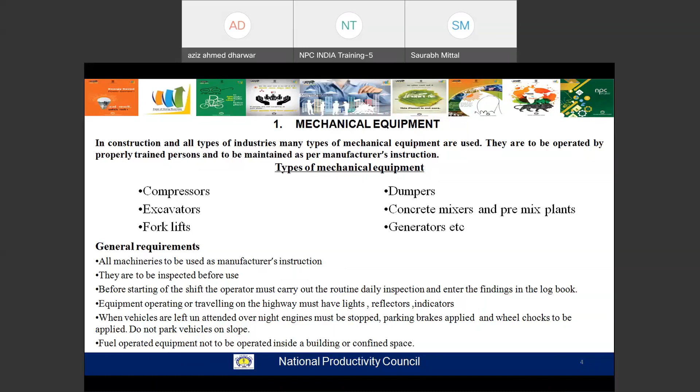Okay, so next part, regarding the dumpers. Dumpers we have seen in many places, and we normally use them in the construction field. These are normally called tippers also.

The main important safety aspect here is that overturning might happen, collision might be there, especially on slopes there are chances it may overturn. We have some safety devices with respect to overloading etc. that have to be kept properly. And for loading, normally what we do is we overload it.

For using these dumpers of different types, there are different safety precautions, especially the rear part, the skip. If the dumper or tipper is very long, when it is being lifted, the safety precaution we need to check is the overhead wires, overhead cables. If overhead cables are there, there are chances it may be electrocuted, so we have to watch for that.

Apart from these safety precautions, normally a reversing alarm is there, a flash beacon is there, and brakes have to be tested regularly, and drivers have to be trained properly.

One more thing, apart from compressors, normally we use forklifts in the industries, maximum places use them in industries. They have to be used carefully because one thing we've seen with forklifts is they are battery operated, especially when used inside the industry.

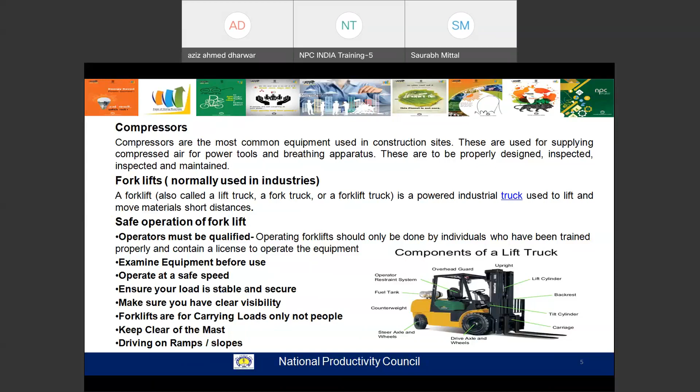Loose items are not to be carried on the forks because there are chances it may fall. It has to be tied properly. The items should be tied properly, and only then should it be used. But the main thing is that the driver has to be trained properly on how to use the forklift.

With respect to generators, this is also a main important item in industries as well as construction. Earlier, open generators were there and there was a lot of sound. But nowadays we have acoustic containers, where in the figure you can see the acoustic container, and the generator is normally used for the supply of power.

Whenever we use a generator, the exhaust has to be directed properly, normally outside the container or acoustic container. There are a few things to observe here. What happens normally while refueling the generator with diesel, or while servicing it, is that there are chances the fuel will spill out throughout the container, and that becomes a very good chance for a fire hazard.

So we have to check that in case there is a spillage of fuel or oil, lubricating oil which we use for servicing, etc., we have to clear it off. Normally it is used outside, and the sound effect also will not be there.

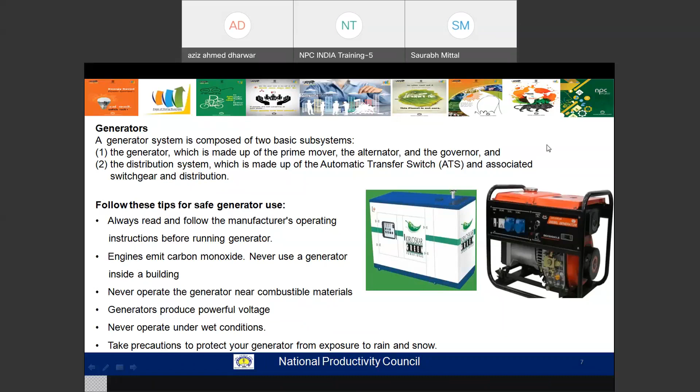Next part is mechanical hazards. What are the different types of mechanical hazards with respect to different types of equipment? Whenever we are having a mechanical equipment, there are chances that we may come across some mechanical hazards. Normally these hazards are of different types, as given in the slide.

The rotating shaft hazard, pulleys, sprockets, gear entanglement. Hard surfaces moving together or crushing, scissor or shear action severing. Then sharp edges, moving or stationary, cutting or puncturing. Cable or hose connection, slip, trips, and falls.

These are the different types of hazards normally what we come across with respect to mechanical hazards. Depending on the type of machinery or equipment, these hazards are applicable. So whenever we are working on these things, we need to have a safe access, and there are certain corrective or preventive measures we have to take care of.

Number one, first and foremost, we should try to eliminate it. In case we are able to eliminate it, that is well and good. Normally the elimination takes place at the initial or engineering design stage itself. Second is administrative control.

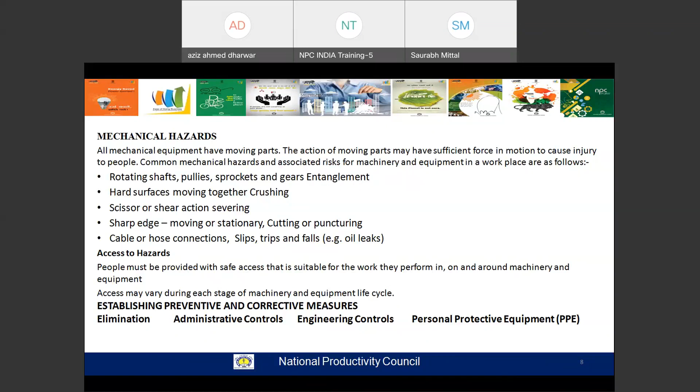Now when we say risk control for mechanical hazards, these are the three points we need to check. One is distance, second is barrier, and third is time. Distance means we have to keep a person without coming in contact with the hazard; he can operate from a distance.

A barrier can be put in between where the person is not able to reach the hazard, or a control of the ejection parts, etc. And time is normally what happens: the moment it is connected with sensors, the moment the person comes near that particular place, the machine stops and becomes disabled.

So regarding the barrier, normally we use guarding, which with respect to our Factories Act, Section 21, is given as fencing of machinery. The guarding can be of any type - fully covered, half covered, or quarter covered - but the only requirement is that the body will not come in contact with that particular hazard.

Second is the interlocking. Interlocking can be mechanical or electrical, hydraulic or pneumatic. The moment you want to start the machining, interlocking facility will be provided - until you lock it or cover it, it will not start. Suppose in case you start it anyway, it will give an indication that the door is open, or something like that.

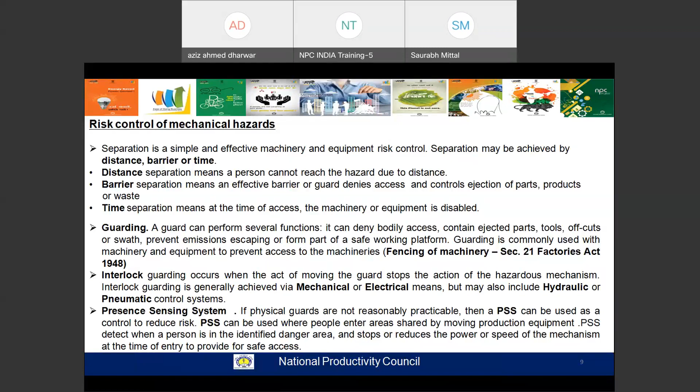Next part is control of non-mechanical hazards. Non-mechanical hazards are of two types. One is ventilation and temperature, where smoke etc. is likely to come up. This is non-mechanical, meaning it is a hazard produced by a mechanical equipment. So here the main thing is ventilation and temperature.

With respect to the Factories Act also it is given - ventilation and temperature are both interrelated. In case the ventilation is not available, then definitely the temperature will increase and dust and fumes also will be present.

So when we check ventilation, we have two types: one is mechanical and one is natural. Natural ventilation, we need not have any equipment - we can open the doors, windows, etc., and whatever gas, exhaust, or smoke is available will just go out. But for natural ventilation, we need to have a flow of air.

Whereas mechanical ventilation, we have two types: one is local and one is general. Apart from that, we have HVAC also. Here we'll be using two types - one is general ventilation, where the exhaust fan can be installed and whatever heat or dust etc. is there, is thrown out.

Apart from that, there is local exhaust ventilation, where wherever the heat, smoke or dust is produced, from that particular area it will be sucked and thrown out. But for local ventilation, we need to have a collecting point at the exhaust end. That is very important, because we cannot just throw the contaminants from inside the factory into the open air.

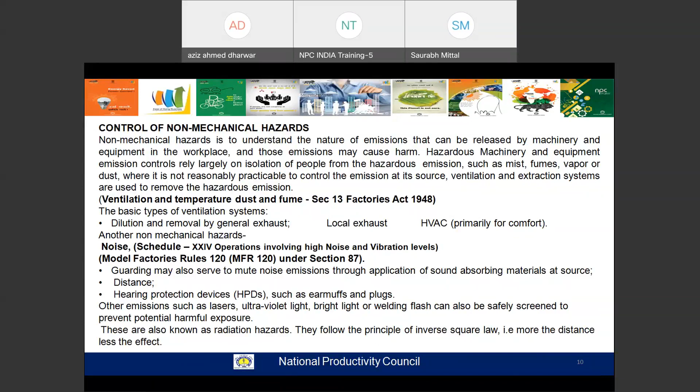Next part we will come to crane safety. Cranes are used in different types of industries as well as construction sites. So what is a crane normally? It is a lifting machine. Lifting means it lifts vertically; you are not supposed to use the crane for horizontal pulling, etc. For the basic principles of the crane: number one, whenever it is installed, it has to have a center of gravity, it should not have an imbalanced gravity. If the center of gravity is not there, there are chances that the crane is likely to trip off.

Second one, leverage. For leverage, the principle we normally follow is the safe working load - the capacity it has. Accordingly, we have to lift it. What is safe working load? We'll check that out later on.

Then stability of the crane is very, very important. If the crane is not stable, it is likely to topple off. For stability, we have to check it out with respect to the foundation - where the crane is standing, where it is situated. When we say foundation, it's not only the crane itself, it has to be the ground level also - sound, solid ground. In case there is disturbed sand, especially in construction, there's a lot of disturbed soil available, because many times it so happens that we go for trench excavation, etc.

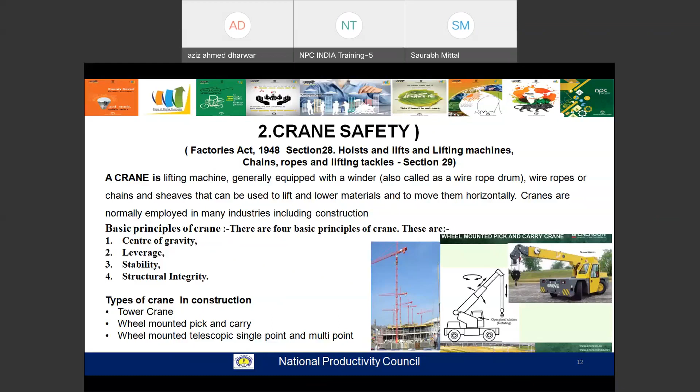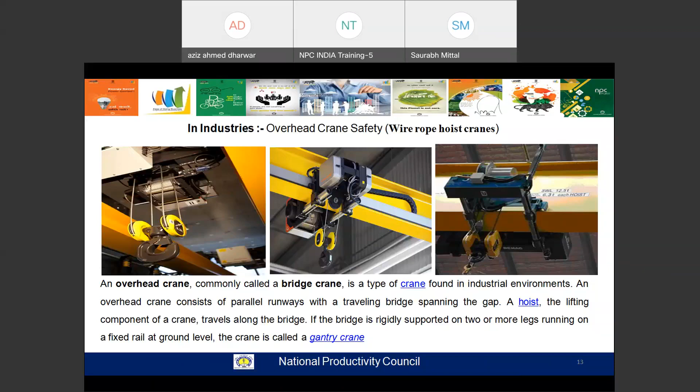When we go to industries, we have the overhead crane, bridge crane, and so on. But the principle here is the same - we need to check the safe working load. Here in the third figure, it is mentioned as 12.5 ton capacity, which we have to check. But the capacity is a different part; when we go with the lifting part, we need to check the slings, etc.

In case you have to move the load, it should be at least 50% less than the maximum working load of that crane, if you are moving it from one place to another on the ground. They have different criteria for that. The ground level should be correct, and the crane should travel at walking speed.

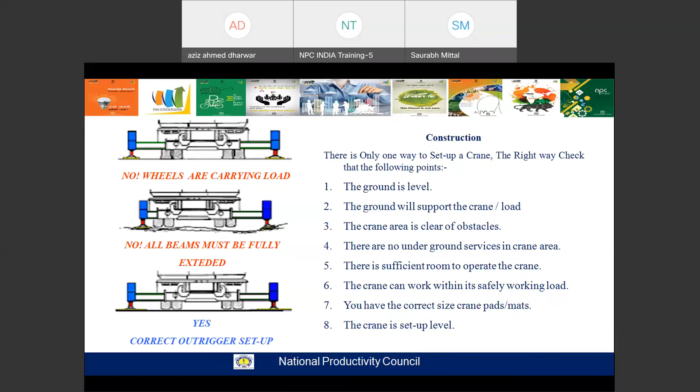There has to be a beacon which keeps flashing, and the rigger will walk in front of the crane. Before doing all this, you have to check the entire area along the route of the crane, from where to where it is going. There should not be any disturbed soil in between, no covered trench, etc. The crane should be able to go comfortably, and there should be room for the crane in case it needs to reverse and come back.

Now there's a confusion normally about what is the thing. Many persons say that safe working load and working load limit are the same. Both are not same. Safe working load is given by the manufacturer, and a working load limit is given by the person who is in charge at that particular place.

The reason for this, I'll tell you with a simple example. If you purchase a new motorcycle, the manufacturer will give you around 80 kilometers per liter mileage. He will tell you, yes, my vehicle will run for 80 kilometers per liter. But the person who is driving, and the route in which he is going, if the driving is not proper, what will happen? It may not give 80, it will give you only 60 or 65. That means a difference of 15 to 20 kilometers.

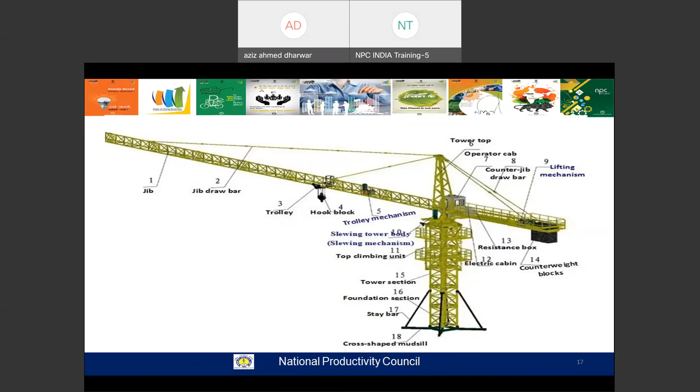In such cases, there are some conditions where the load cannot be lifted in bad weather conditions. If there is a bad weather condition, rain, snowfall, or a heavy wind like a storm, etc., these cranes cannot be utilized.

And for all the cranes, the lifting equipment has to be tested every 12 months normally by third parties. But the driver, the crane operator, needs to have two types of licenses. One is a crane operating license, and another is a heavy duty driving license. Once he has these, he should be medically and physically fit, and the medical certificate has to be provided by the operator.

And a signaler also must be issued a competency certificate, because in case of signals, a person needs to know the crane signals. Both the crane operator as well as the signaler or slinger, or in some cases known as a rigger, must have clear information regarding hand signals or crane signals. The crane signal is normally used because, in case of a walkie-talkie or oral confirmation, the person may not be able to actually understand what signal is being given or what is being communicated.

That is why the hand signals are being used. But at some times, regarding tower cranes, when it is at a very height, there may be walkie-talkie instructions also along with the signals or hand signals. In case of hand signals, the operator as well as the signaler should be trained.

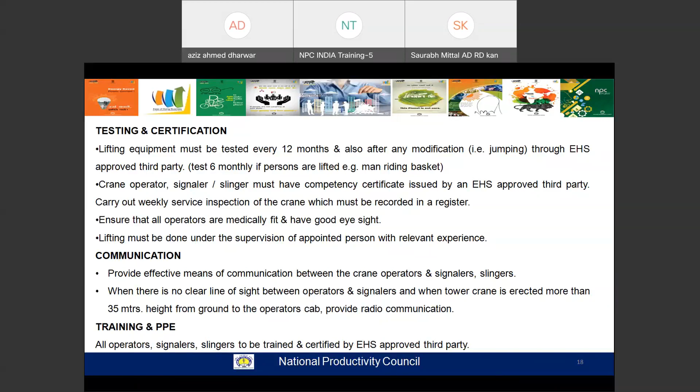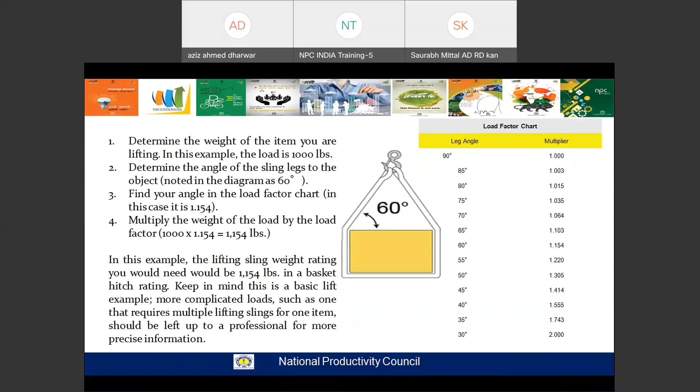Normally we use 90 degrees, but there it is the hooks and all, they will be using a different type. That will be two-way hooks, 2 legs or 3 legs or 4 legs. Normally that also will be used, or only 2 legs also will be used, depending on the construction or the size and the figure of the load.

Now, when we go with the slings, there are 3 types of slings: nylon sling, wire rope sling, and chain sling. When it is a nylon sling, we need to check it out with respect to where we are using it. Normally, we cannot use it beyond the temperature of 90 degrees, because nylon on hot surfaces we are not supposed to use. Nylon slings are normally used for things where, especially in industries, we are likely to ship finished goods.

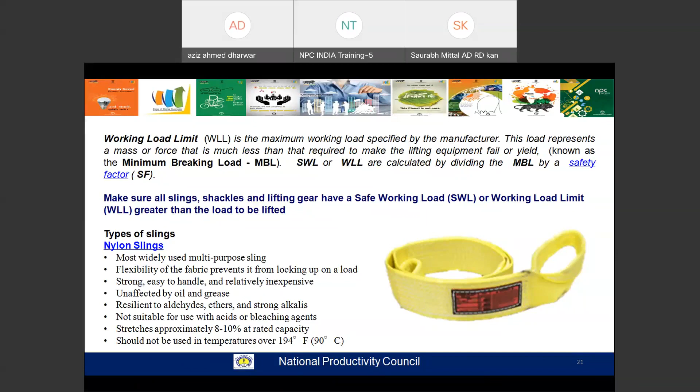Because there are chances that if I'm using a chain or wire rope sling, we can have some stresses or scratches on the finished goods. In such cases, we use nylon slings instead of chain slings or wire rope slings. These are different types with the 3-leg, 4-leg or simple, depending on what type of rope you are using.

Hello? Anything? Hello?

Anyway, so wire rope slings, we have some 2-leg, 3-leg also, or 4-leg also, depending on where we have to use it. But when using a wire rope sling, we need to check the angle we are using and the safe working load. It will be mentioned on that, the safe working load.

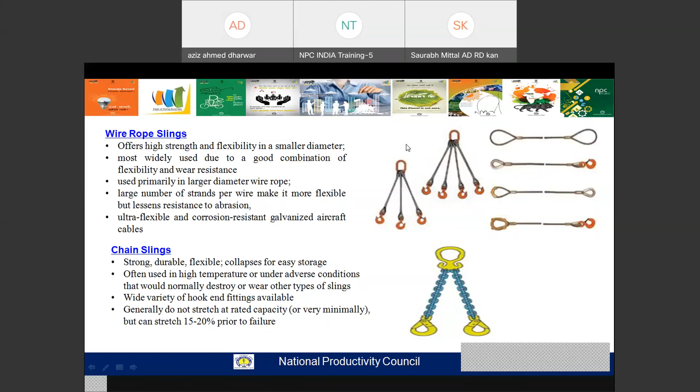Okay, same thing with respect to your chain also. There are some things we need to check out, and that is the different types of wire in a wire rope, the sling markings. On each and every sling, there will be a marking stating what is the working load limit, safe working load.

At times, if these markings are not there -- here you can see in this figure, we have a 3 ton, 3.5 ton -- safe working load is given at different places, such tags or impressed markings will be there, mentioning what is the safe working load. In case if it is not there, we are not supposed to use this, because if there is a doubt, definitely we need to stop it.

And when we go for the nylon slings, we can identify them by the stripes in between, the black stripes. If there is one strip, it is known as 1 ton. If there are 2 strips, it is a 2-ton capacity. If there are 3 strips, it is meant for 3-ton capacity. If it is 4 strips, it can be of 4-ton capacity. The number of strips is normally in black so that it is easily identified.

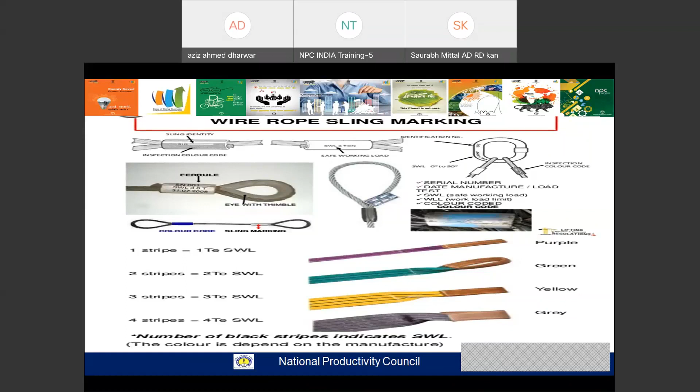Inspection normally for each and everything, there are 3 types: initial, frequent, and periodic. Periodic inspection happens at a particular period of time when the equipment or material is not being utilized or used. Frequent inspection is done whenever the person is handling the particular sling, you need to check it out. Initial inspection is whenever it is a new one or whenever you are starting the job.

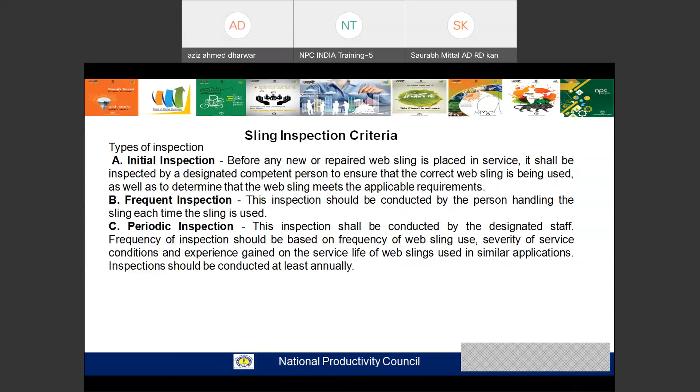The best practice is to use the sling after having an inspection, before and after the work. Now, when we say we have to do inspection, what are we supposed to check out?

Here are a few of the defects which are available, shown here. In web slings, there should not be a tear. On the right side, you can see in the web sling there should not be any wear and tear of the nylon part or threads. In case it is being used on a hot surface, there may be chances that it might have burned off or the threads have come undone.

If you see the bird caging, normally in the center, on the right side it is a bird caging. Bird caging is regarding the pull of the strands of the wire rope, which should not happen. On the left side we can see kinking. Kinking normally should not be present. This happens only when there is a force on the particular wire rope so that it gets bent. In such cases, if there is kinking or bird caging, or if the strands are broken, the best thing is that we need to change it, not repair it.

And there are sometimes when wire ropes are subjected to acid contents, chemicals, etc. There also there are chances that they may become weak.

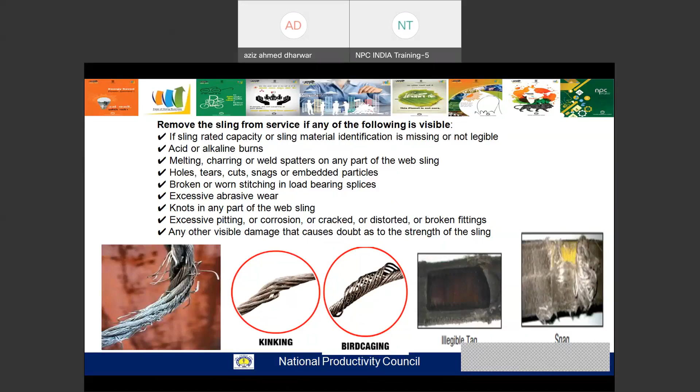So in such case, if the length has increased more than 10% of the chain, we are supposed to replace it, not repair it. We cannot use it even for a lesser weight. Apart from that, the links, wherever the welding is done, wherever the links are connected at the barrel section, if there is a crack or splice there, we are supposed to replace the links.

These different shackles we are using, bow type and D type. Sometimes the center part gets damaged, or the bolt type center part gets damaged, and what is normally done is people use a normal bolt or similar. That is not accepted. We have to use the proper part, because it is mentioned for how much weight it is applicable. So this full product is rated for that particular weight factor, so we have to replace the whole thing, not part by part.

We cannot use a normal bolt thinking it will just work fine as a replacement. In such case, it will not be correct, and it may lead to an accident.

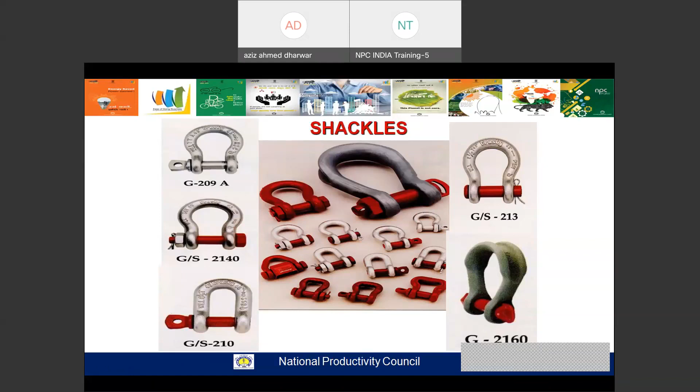So whenever we are using a crane, the overall boom part has to be at least 1.5 times from the center of the crane, the swing part. And we have to barricade the total area 1.5 times. So whenever we are rigging, we need to check out some safety measures.

We have seen what this is and how we have to do it. But the main part comes when we are rigging.

Whenever we are rigging, here are some load indicators. That is, overload indicator is there, load moment indicator is there, also known as LMI. We have safety catches, emergency escapes, etc.

So, load moment indicator or overload indicator - normally what happens is, it has been observed that in some construction fields, these things, the LMI, that is load moment indicator or overload indicator, they are bypassed. So if they are bypassed, you will not get the indication, and when you don't get the indication, there are chances that accidents are likely to happen.

So safety catches, if they are there, safety methods, safety equipment, in case of these, both are safety indicators only. In such case, accidents are likely to happen.

And emergency escape, it is there. Emergency escape normally happens in two types. Whenever there is an accident or toppling, or in case the crane comes in contact with the electrical wire, the method for escaping is there.

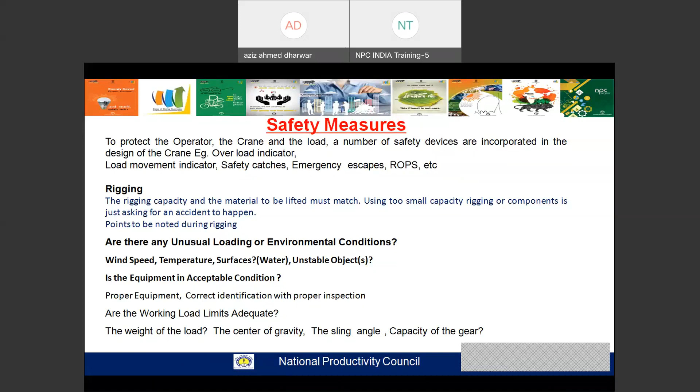We should not give a jerk. If we give a jerk, there are chances that the wire rope, or the crane's chain sling, is likely to get damaged. And especially the hand signals.

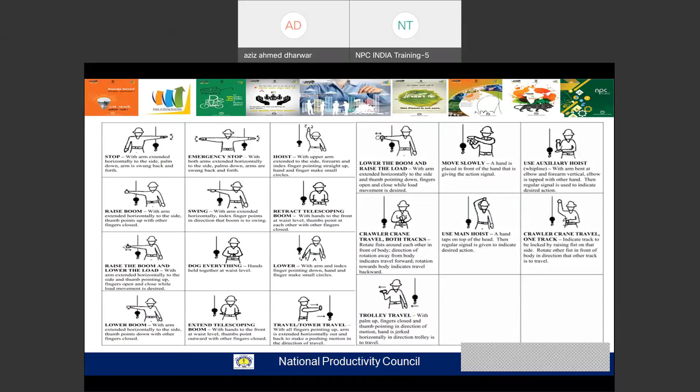These are the different types of hand signals we are supposed to know. Any rigger, as well as the operator, is supposed to know the hand signals. Without knowing the hand signal, you are not supposed to ask them to do the work, because if they misunderstand the hand signals, then there are chances that accidents are likely to take place, because the hand signal gives a person the indication of what he has to do.

But when using these hand signals, there has to be a clear view between the operator and the signaler. That is very, very important. And if a clear view is not possible, then a third person can be utilized.

For giving a proper signal, a competent person should be utilized for giving a correct signal to the crane operator. If direct eye contact is not possible, then only two persons, one the rigger and one the operator, or a third person can give signals in case of emergency. Signals are to be given with only one hand, not two, because using two hands can cause confusion and the operator will not understand.

No matter who the signaler is, whether a single person or two persons, if any third or unknown person asks to stop the movement, the operator has to stop, because there may be dangerous conditions not visible to the signaler or operator. For lifting and movement, instructions should only be taken from the signaler, but for stopping, instructions can be taken from anybody, since it indicates a possible dangerous condition.

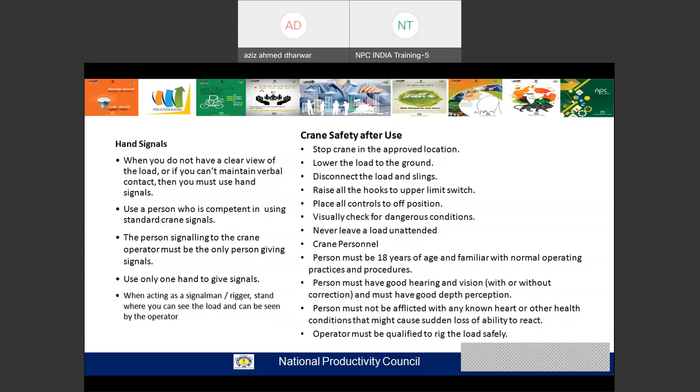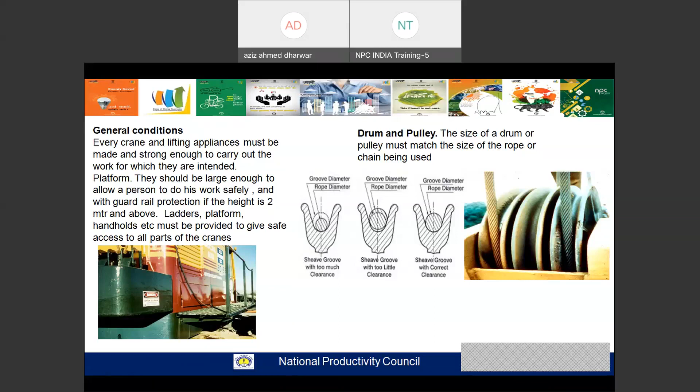In the first two examples, either the groove is more or the rope is more. In both cases, there are chances that if the groove is more, the rope will go off, and if the rope is more, the groove will go off. The diameter of the rope and the diameter of the groove sheave has to be correct, with no difference, otherwise there may be a slip of the rope or a problem while operating.

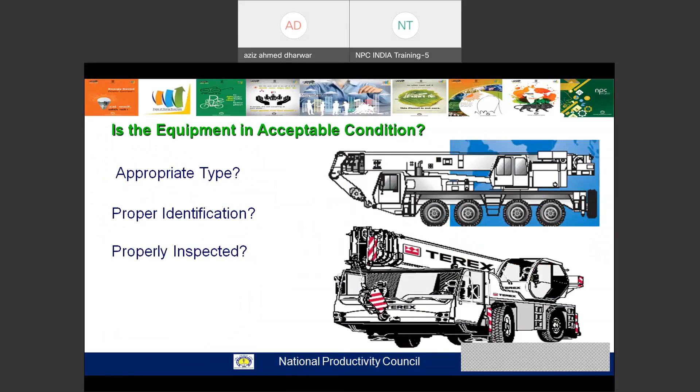So here the acceptable condition and appropriate type has to be checked. The condition of the vehicle should be correct, with proper inspection and identification done. For rigging, we have to check the wind, surface temperature, water, etc.

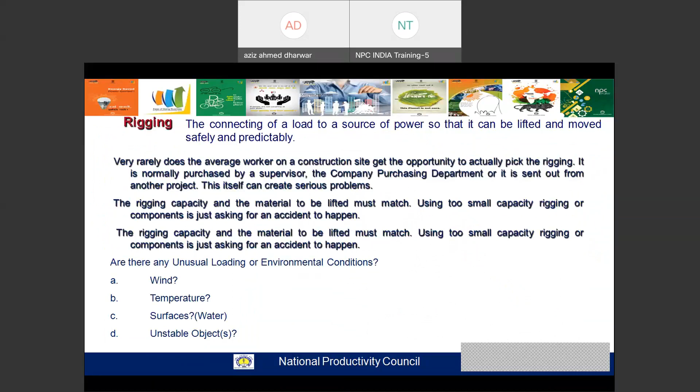When working with load limits, we need to follow certain clearances: what is the weight of the load, whether it is suitable with the crane's SWL, where is the center of gravity of the crane, what angle we are supposed to use, what sling angle we are supposed to use, and whether there will be side loading, which is normally not permitted. If it is there, we need to check it out along with the capacity of the gear.

Apart from that, regarding chains, as I told you, we are supposed to check chains, meaning the slings. Whether it is a wire sling, a chain sling, or a web sling. For chain slings, we need to check for any cracks or nicks, worn out links as I explained to you, or if any corrosion is there.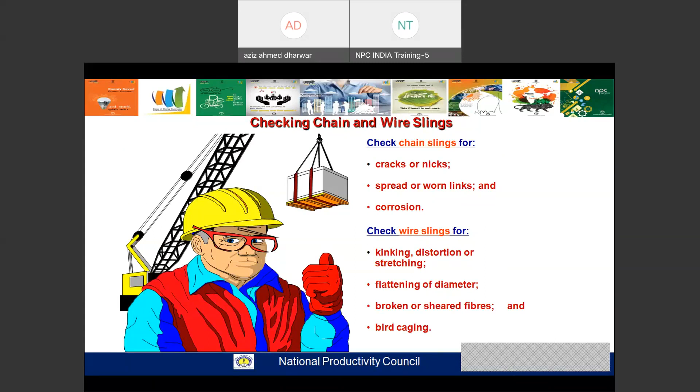In case of wire sling, kinking should not be there, as I showed you the defects. Distortion or stretching should not be there. Flattening of the diameter - yes, there are chances, because if you are pulling the wire rope on the ground etc., there may be some abrasion, and because of that the diameter might be affected, along with broken or sheared fibers, and bird caging. These things should not be available.

So whenever I'm lifting, this is one thing we need to check out - the weight of the load. We need to know the shape and substance of the load - what is the shape and what is the substance inside that particular load. Because if it is a liquid form or a cylindrical form, then we need to have proper rigging. The maintenance of the sling and gear, we need to check that out.

The communication system, whether it is working correctly or not. In case we are using a walkie-talkie, the working radius has to be marked, as well as the weather condition.

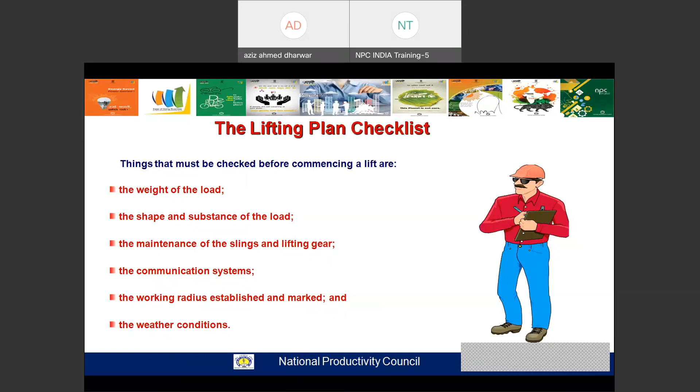Next chapter, what we'll be taking out is the work permit. Now, what is a work permit? Work permit is instructions given to a particular person to do a particular work at a particular period or specified work at a particular location etc. But what happens normally when we give a work permit - it should not be oral. Normally oral work permits are not accepted. It has to be a written work permit for a particular work, a specific work location, for a period of time.

These are used for controlling and coordinating the work to establish and maintain a safe working system. Work permit is also known as SSW, safe system of work, because without a work permit we are not supposed to do work practically, with respect to safety aspects I'm talking about.

So in case we are giving a work permit, there are different types of work permit, but we give it in written form. The reason for written - as I have mentioned - is that verbal instructions can be misinterpreted, meaning you may not understand or we may forget, which may lead to an accident. Especially in the construction part, the work permit is required.

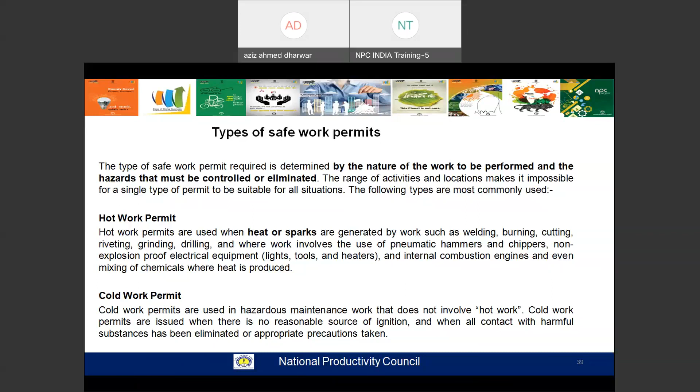Where hot work is not there, but the work conditions are hazardous, where there are chances of accident, etc., in such case we normally give a cold work permit. In cold work permit also, we need to check whether it is of a hazardous nature or not. So that is a cold work permit.

But when we say confined space entry permit, confined space is a place where an individual is not able to work for a longer period. There may be some contaminants of different types of gases, whether it is a toxic gas or a suffocating, asphyxiating gas, or even in open areas, if the depth of the excavation is more than 4.5 feet, we need to use a confined space permit, because there are chances that if the depth is more than 4.5 or 5 feet, toxic gas heavier than air might be settled over there.

So in such cases, we need to check it out with the confined space entry. In that case, we need to check the hazardous conditions of that particular place with the help of a chemist, and check the conditions of that particular atmosphere inside the confined space.

In such cases, gas inspection and gas testing is done at the lower level, middle level, and top level. If it is done only near the entrance, that is not sufficient. It depends on the type of work we are doing.

If the type of work is different, we have to go into a sewer, we have to go into a big cylinder, or in case we have to go into a silo. In that case, depending on the type of gas condition, the gas testing has to be done as per the instructions given in the work permit.

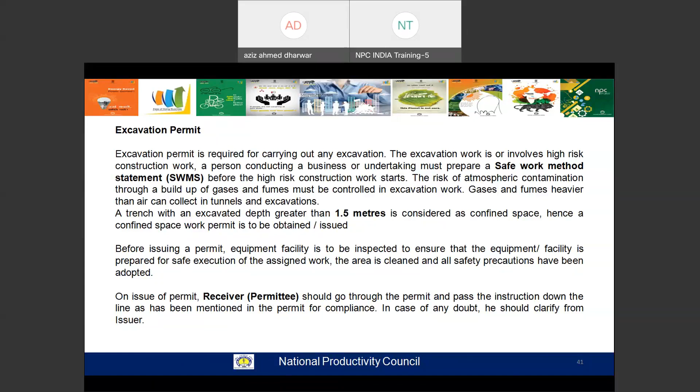Then whenever we are giving a work permit, how is the person supposed to give it? See, suppose I have told you here about confined space entry. So actually what happens, the work permit procedure, we normally ask for the work permit one day in advance.

When we know that we have to do work at a particular place, we give a request to the person issuing the work permit one day in advance, so that the individual who is supposed to give the work permit has to inspect the place for which he is giving the permit. He has to identify the hazards, etc., and then accordingly give the work permit. He cannot just blindly give the work permit saying, okay, you take this.

That is not the correct method. He has to go to the particular place. Suppose if it's a confined space entry, if he has to get inside the silos, etc., or some other places, what is he supposed to see?

In case he is going inside the place, he has to do gas testing to see what type of gas is there, whether there is some toxic gas and all. He has to go with his breathing apparatus, etc. He has to check it out, or tell his chemist, the authorized person, to check the gas testing and inform him, or give a supporting document to the authorized person.

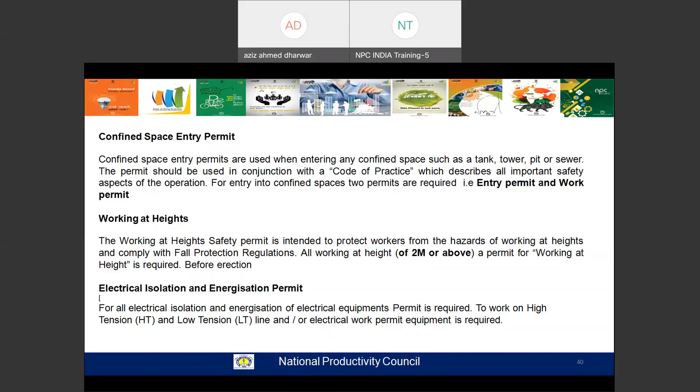As you enter inside, the smell will keep on increasing. The same thing may happen inside the confined space also. It has to be taken up very seriously, because if it's a toxic gas, the permitter cannot just say 'okay, no problem, you can go and work, nothing will happen.' There are conditions that, in case required, the supervisor has to be trained in gas testing also, so that if conditions require gas testing after every 1 or 2 hours, depending on the type of work, he is supposed to do it, because he'll be authorized and trained. That is the condition especially in confined space we have to check.

So whenever such a thing happens, the work permit has to be given. When the work permit is given, it has to be displayed at the place of work. If it is a confined space, the conditions are different, so it has to be placed at the place of entrance.

But in some cases, the work permit can be cancelled. It can become void if the nature of the job for which the work permit is given is not as per the nature mentioned in the work permit. If conditions change over there, it has to be revoked.

Second part, if the weather conditions change, or due to some weather conditions you have been asked to evacuate the area, in that case also the work permit will become void. The second time you are going, you have to reschedule and take a fresh work permit.

Or if some emergency conditions develop, whether inside the confined area or outside the area, and you are asked to evacuate that particular place, in that condition also we are supposed to cancel that work permit and issue a fresh one.

And the last one, when the work is completed, only then can we return or surrender the work permit to the concerned person. But before receiving the work permit, the person who issued it has to check the conditions for which it was given, the reason being we have to check whether the condition has been fulfilled or not. The person who gave it has to confirm whether it is fully satisfied.

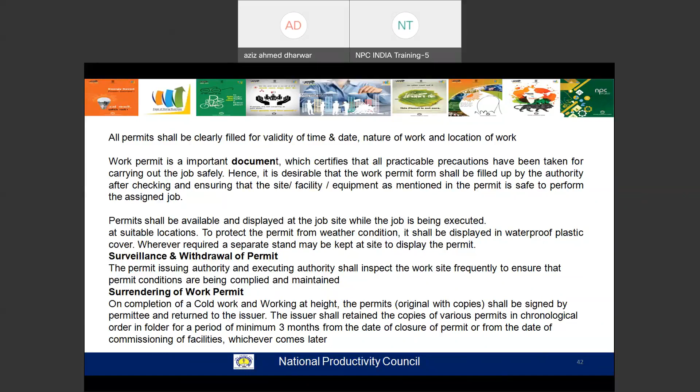Next part, we'll be going with scaffolding, a very important factor especially in construction. Scaffolding is nothing but working at an elevated platform or height, and it is a temporary work platform. Scaffolding normally comes in different varieties and types, so we have to check what type of scaffolding we are going with.

Scaffolding is of different types, and we have seen different types in construction areas. But what it should be is this: scaffolding normally has to support three things, men, material, and machineries. Men means how many men are working, material means what material we are using on that particular scaffold, and machineries means what equipment we are using. The weight factor is especially important, scaffolding goes with the weight factor, how much weight is being used with the help of these three M's.

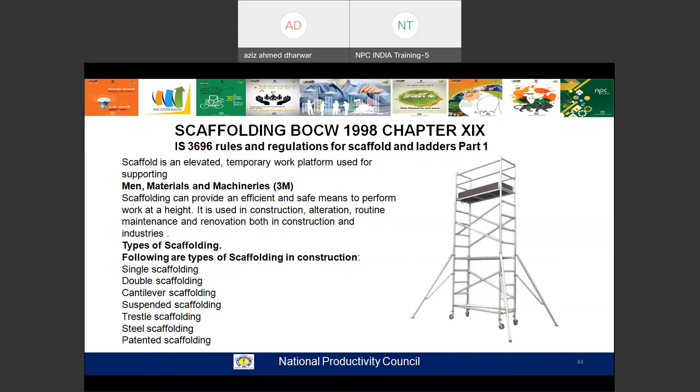As I told, there are different types of scaffolding: single, double, cantilever, etc., depending on the type of work, and steel scaffolding is also there. Normally the material being used is of two types, either tube and coupler, or fabricated type.

So before using a scaffold, before erection, what do we check? Number one, sound design, meaning the material you are using has to be strong enough to take the load. And the selection of the right type of scaffold, whether it is single, double, or mobile, depending on what type we need.

The persons working on the scaffolds should be trained to work on the scaffold, because scaffolding work is working at a height. If a person is not trained properly, there are chances that he may fall down and get injured, or sometimes it may even be fatal.

Even climbing up and down of the scaffold is very important. And when you're using a scaffold, when you're working at a height, fall protection is supposed to be provided or used. So whenever you are using or erecting a scaffold, proper guidelines have to be used, and proper guidelines have to be there for using it, and for alteration or dismantling in case it is required.

Now, when we say proper erection, the same thing is applicable as with the crane. The sound foundation has to be there - the foundation, the soil, the earth, whatever it is. So the foundation has to be very, very sound, very strong enough. Now, when we say strong enough, how are we supposed to check it out?

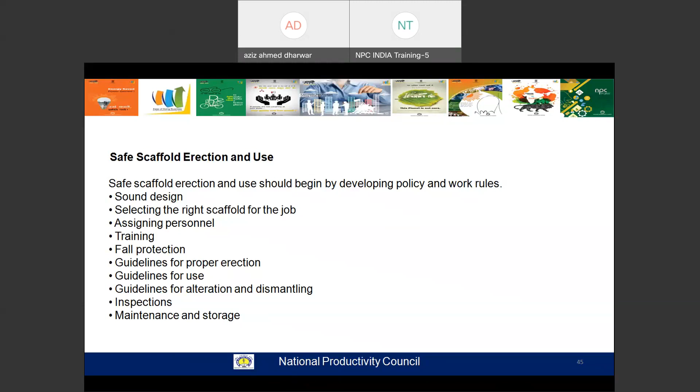So when we say about a scaffold, it has to be designed for 4 times the maximum intended load. What do you mean by 4 times? Suppose, as I told you, 3M - man, material, and machineries - if the total weight of that particular 3M is around 100 kgs, I'm just giving an example, then the scaffold should be designed for 400 kgs. That is 4 times, because there are chances of some shock absorption, etc.

There may be some rough usage also. So this scaffold, what I'm talking to you about, is erected on the soil, on the ground floor, ground level - it is not suspended. Suppose if it is a suspended scaffold, normally it is suspended from the top end of the building. Normally this is only for finished buildings.

In that case, for the suspended scaffold, the ropes on which it is suspended, each rope should have a maximum intended load capacity of 6 times. Suppose if you are using 100 kgs on the suspended platform, the rope should be rated for 6 times that, because the life of the individual working over there is hanging in between. So the strength of that particular rope should be 6 times the intended load.

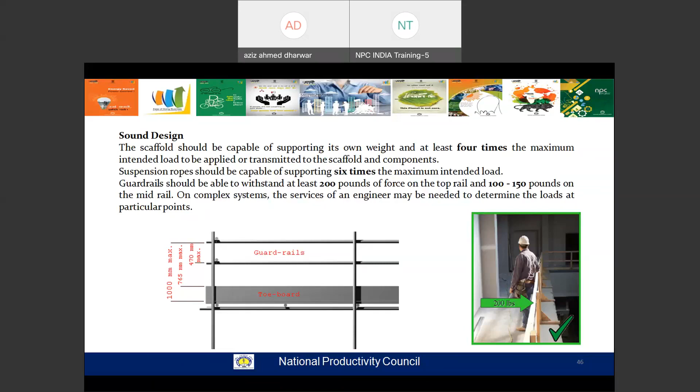So we have a top, middle, and bottom toe rail, but at the same time, in the figure it is given as a toe board. The reason for the toe board is that if anything is lying on the floor, while walking around or through rolling, it should not fall on somebody's head at the bottom. That's why we put up a toe board. Normally it starts from 4 inches to 6 inches, or it may be more, depending. So sound design has to be there - normally the weight and structure of the scaffold is known as your design load.

For a light duty, it is up to 150 kg per meter square, in case that much weight is coming down. If it is medium duty, it is 200 kg per meter square, and heavy duty is 250 kg per meter square. So for a given area, different types of scaffolds have to be designed according to the requirement. But normally it is done with heavy duty only, because light and medium duty also can take care of that.

When we say guardrail, that's fall protection. It has to be provided in case a person is working 10 feet and above the ground floor. There are some specification changes. Earlier it was 36 inches, but nowadays it has gone up to 38 to 45 inches, depending on how much height you require, but minimum is 38 inches, which is approximately 3 feet 2 inches.

Whenever you are removing the guardrail, or working without it, you need to wear a full body harness with a rope grab, and an independent vertical lifeline has to be there. Lifeline is the metal rope stretched between the top and bottom floor. The wire rope is normally 10 to 12 mm thickness, and it should be able to take a weight of 5,000 pounds. That should be the strength of that particular wire rope.

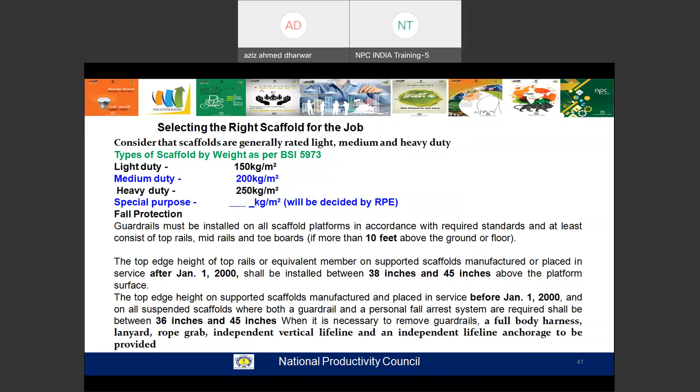But nowadays, what has been observed throughout the construction period, this is meant for tube and coupler scaffolds. But nowadays we are not using this, because in such cases we have different types of materials, almost 10 to 12 types we are supposed to use, and there are chances that a lot of material gets misplaced, especially at the construction site. So we use a different type, a cuplock type of scaffolds, which I will show you later.

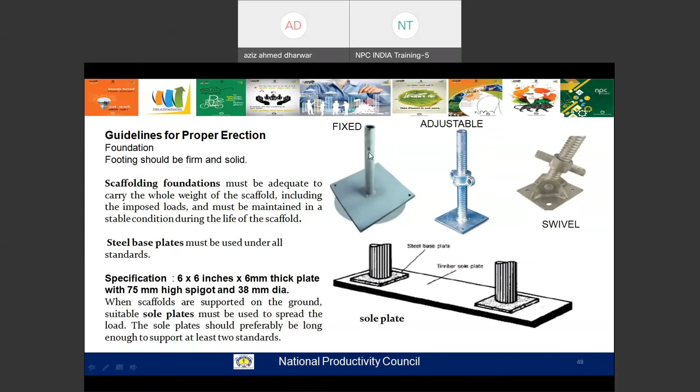The post and standard, why it is mentioned - it is as per the US or BS standard. US standard and BS standard. Sometimes it is known as a standard and sometimes it is known as a post.

The horizontal member is of two types. One is a ledger, which goes lengthwise, and the transverse type, which is known as a transom or bearer. The ledger is also known as a ledger or runner, and the transom is also known as a transom or bearer. These transoms are the things which take the load of the plank.

These are the base plates. Okay, here I'll just tell you what it is.

The standard or post has to meet 3 conditions. The first condition is it has to be in plumb. Plumb means it has to be exactly at 90 degrees in a vertical tube, so that from all sides it has to be straight.

Second, it has to be in alignment. Alignment means it has to be in one single line. It should not be on the left or right side. If I stand at one place, I should be able to see only one standard.

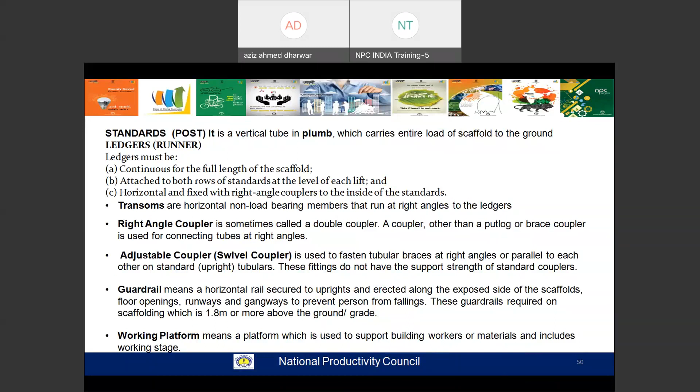These are three types, and normally we have a guardrail system. We have to use a guardrail so that the individual does not fall. The height between one platform or plank to another platform is normally made up to a height of 6.5 feet, so that one individual can move around normally. That particular part is known as a lift. There are different technical aspects we use normally.

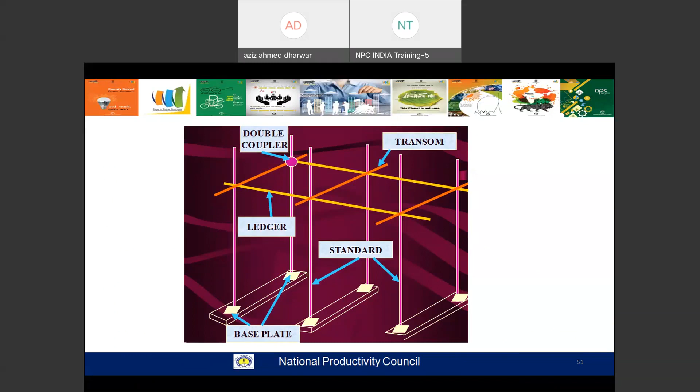When we use scaffold tubes, there are different defects we normally find in construction - there may be corrosion, rusted tubes, bent tubes, split tubes, sharp edge tubes. Normally what happens is when we take out a scaffold tube, we throw it from the top, and when it falls on any hard surface these tubes get damaged. We are not supposed to use any damaged tubes because it will not give you the correct plumbness.

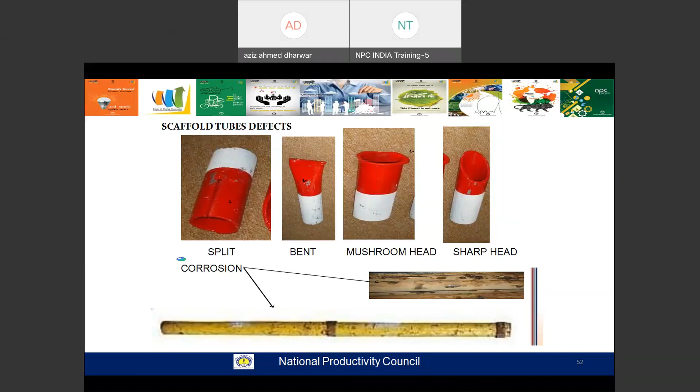Plumb means straight - it will not be there. In case it is not straight, we cannot take it to the end. As I told you, the ties - these are different types of ties we use: box tie, through tie. These ties directly connect the scaffold to the main structure. The reason for this connection is so the scaffold should not fall down, especially to resist the inward and outward movement of the scaffold.

Apart from that, this resistance is required because of the high wind direction, or whenever you are moving on the top, there may be movement and chances that the scaffold may break off or fall down. To avoid such things, it is firmly fixed with the main structure.

These ties keep on increasing as the building keeps on increasing in height. These ties are fixed right from the bottom to the top, vertically as well as horizontally. The minimum spacing for each tie is between 6 meters, that is up to 20 feet, in both directions.

And braces, as I told you, bracing is at an angle we fix it up with the bracing. Normally there are two types, face bracing and ledger bracing. It is normally fixed on the front side of the scaffold so that our scaffold should not sway, meaning move around.

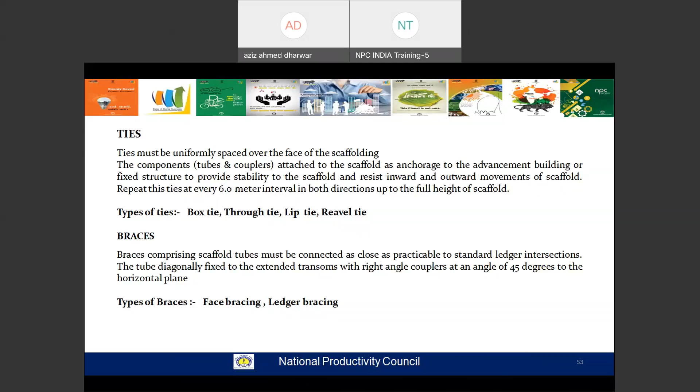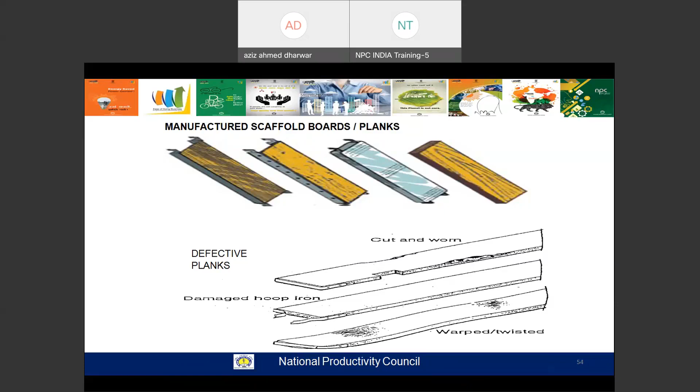Regarding scaffold boards, earlier we used to use wooden planks, but nowadays we are not using them much because they have a lot of problems. Wooden planks get damaged due to wind, rain, etc., and there will be holes and all. Nowadays, normally what is used is aluminum planks or metal planks with in-between holes, which are also anti-skid. Such planks are normally used nowadays.

Then, regarding the green tag, when everything is fine, we use a green tag so that the working person can use it. It means it will be mentioned that it is safe to be used. And normally the yellow tag is used in case any minor repair is supposed to be done. In that case, that particular area is barricaded and the yellow tag is put, meaning not to be used, temporarily out of use.

So this is a flow chart normally used when we have to do scaffolding, etc. One is the request, then so on. I'll not go into much detail because this varies from different companies. Sometimes the main contractor might be there, may not be there; directly it can be informed. The individual company itself might be having their own scaffolding team, etc. So these are the different aspects over here.

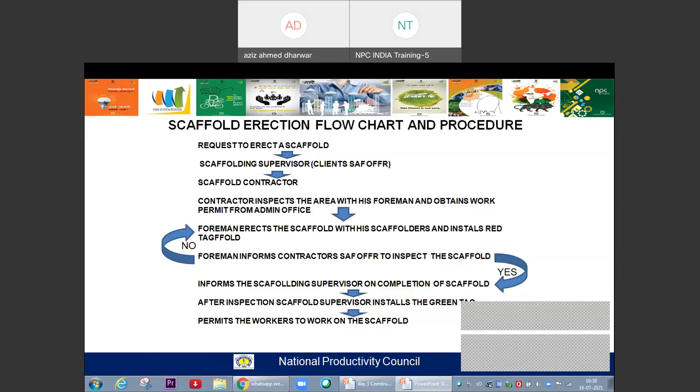So whenever we are doing scaffolding, we need to check out a few things. One is risk assessment. Whenever we are working on that, what are the risk assessments we are supposed to check? Especially, normally depending on the area, we have electrical minimum clearance that has to be there. These are the minimum requirements we need to have, the minimum distance from the point of contact of the scaffold. The minimum is 4 meters distance that has to be there.

This is very important because the persons working on or around the scaffold should not get electrocuted, because sometimes what happens, lifting of poles, equipment, material, and sometimes we are using a crane, or sometimes material is being lifted to the top of the building with the help of a tower crane. So the electrical minimum distance has to be maintained.

Suppose in case it is not practically possible, then there is another alternative: by taking proper permission and involving the electrical line persons, main KV persons, electrical persons, what they have to do is install what we normally do near our homes when the power line is near our house or staircase. We use PVC tubes and put it on that. So the same thing can be done here until the work is completed, to safeguard our people and conditions.

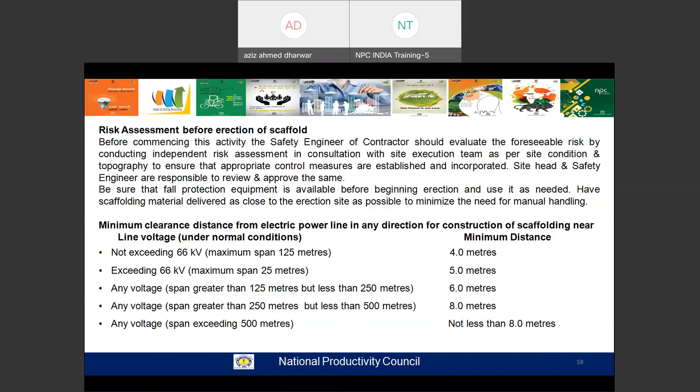Okay, so these are the tube and coupler scaffolds we normally see. This height shows the construction angle that is there. These are normally known as bracing. Here at the back, this particular part is connected to the structure - this is particularly a tie. Tie means connecting to the structure, used at a particular height so that the scaffold should not fall down.

Apart from that, here, see, in this case we don't have one thing, and that is a ladder. Here it is there - the ladder has to be installed either to the left or to the right, depending on the type of scaffold. It varies - sometimes the scaffold is inside on the platform, or sometimes if it's not there, the individual can come down from the construction side, the main structure side, and come and work on the scaffold.

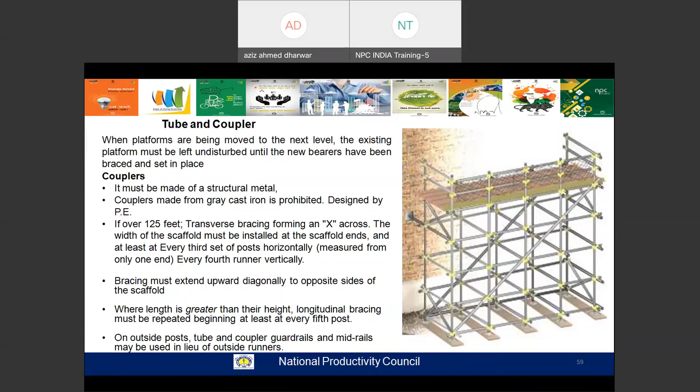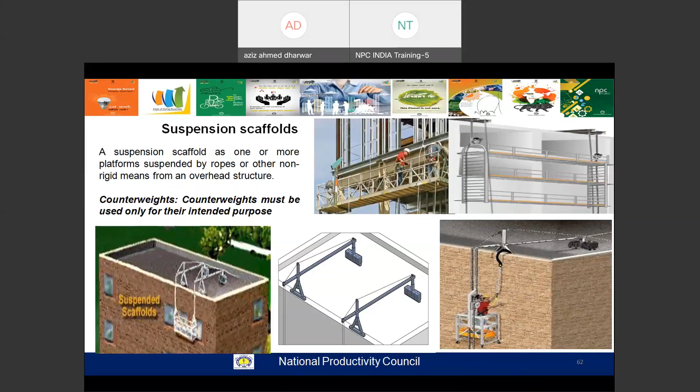This depends - you can see here, this is just like our suspension scaffold, which is like the lifts we use in buildings. There also it's a lift, having a counterweight at the backside of the cage or lift. There it's mentioned you can use either a particular weight or particular number of persons. Normally in lifts we check with 68 kgs or so per individual on average. So this is how the suspension scaffold or suspension cage is utilized.

So to be firm, these are normally the things we have to check: the foundation should be solid, guardrail has to be there, it has to be plumb, level, and square, bracing has to be done, and the platform has to be safe.

Whenever we are climbing and getting down, the safe access where the individual is going up, we need to check one thing - the safety factor, the thumb rule is a 3-point contact program. Whenever climbing any ladder, it has to be a 3-point contact - that is 2 hands and 1 leg, or 2 legs and 1 hand. And the individual has to face towards the ladder, not opposite to it. This we have to check.

This is the safest method, because if we face opposite to the ladder, we won't have a proper grip of our feet onto the ladder rungs or steps, and there are chances we are likely to slip off. The best method is facing the ladder, because then our full foot will be there on the particular step.

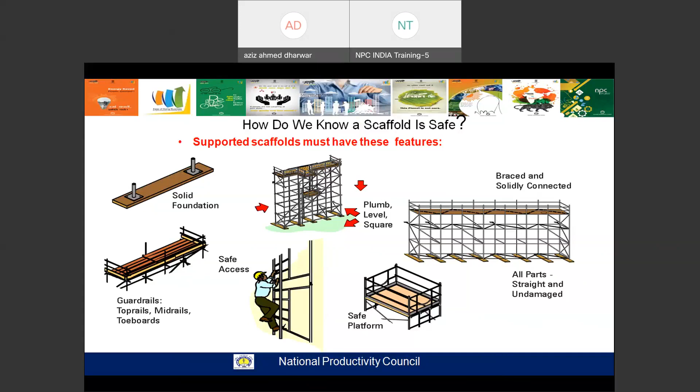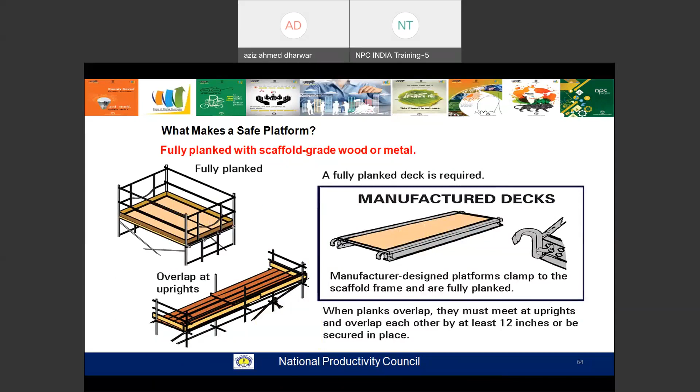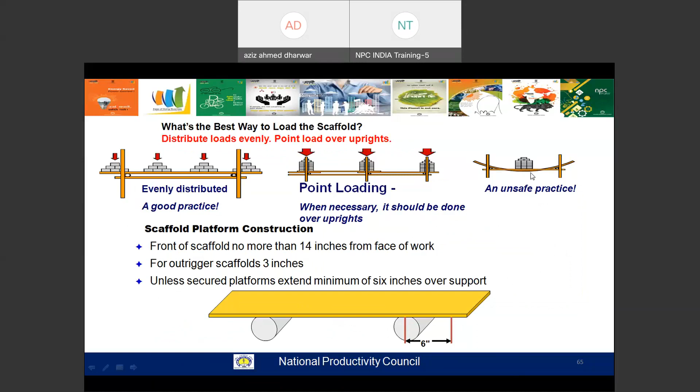Then the decks should be fully planked, no gap should be there, and the overlapping should be done properly. But normally what we use nowadays are manufactured decks or platforms made of metal. Whenever keeping a load on top of the scaffold, it has to be evenly distributed, or placed at the point where there is a scaffold standard, because there will be support at that bed. But if you keep the load off to one side, there are chances the scaffold plank may likely wobble.

The next part I was telling you about is the cuplock scaffold. This is normally used at the maximum number of places. Less material is used - solid material, with maximum very little or negligible spare parts. We can use this at whatever height and whatever space we want. It is very easy to use and very strong, and apart from that it can be easily erected as well as easily dismantled. The erection and dismantling is very fast, and height is no issue.

It is normally used as 1 square meter spacing - the distance between two ledgers. Because it is square, you can call it a ledger or a transom, and it's very easily used, so maximum places use it. But sometimes what happens is that while this is exactly square, the construction building may not be square - there may be some changes, some odd shapes might be there in the building.

So in such places, normally tube and coupler scaffolds are used. When using a tube and coupler scaffold, the plank is normally cut according to the requirement and used. This is because sometimes the edge may be very small, or it might be a triangle, or an odd shape. So wherever there is an odd shape, we normally use tube and coupler scaffold, and the planking will be wooden planking - cut the wood and fix it up.

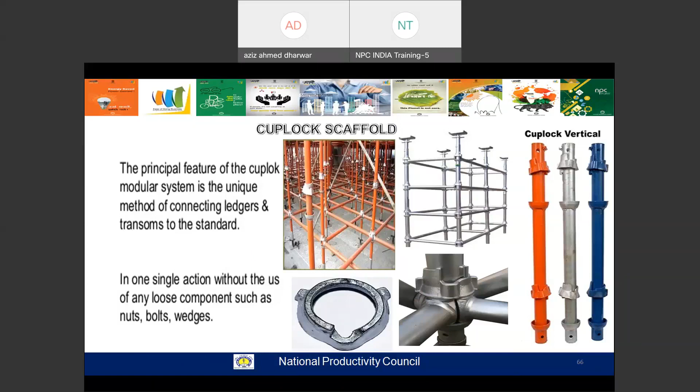Now, the last one we'll be seeing is working at a height. Why do we work at height in most places? Any person working at a height of 6 feet and above - minimum 6 feet and above - that is known as working at height. And it's not necessary that working at a height is only at the place of work, only in industry, or only in construction areas. These happen even in our household works.

Suppose I have to clean my ceiling fan, or change my bulb - what I normally do is climb on a chair and try to fix it up. If I have a step ladder, I take it and try to climb up. Or sometimes I keep my chair onto a table and try to climb it. But the injury likely from these silly things - we call them silly only with respect to safety aspect. For such a simple reason, there may be an accident which is fatal, or an injury which may be lifelong.

I've seen a person who was working on a step ladder. When working with ladders, we have certain rules and regulations, especially with step ladders - we are not supposed to climb to the last platform. But unfortunately, this person had to change a bulb on the ceiling. In commercial establishments, we have POP with concealed fittings. Fortunately his supervisor was standing there. The electrician got onto the ladder but could not reach because of his height, so he climbed to the last platform.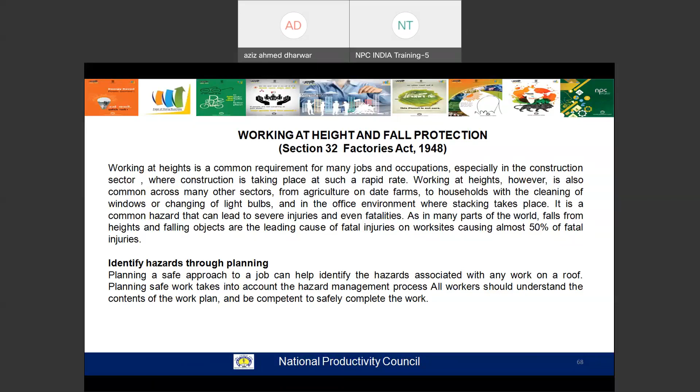So whenever working at height, we'll check it out especially with respect to industries, as well as construction, since working at height occurs in both. Construction is different from industries - here we'll check it out especially in industries. All the industries are open and at a height, they use fragile roofs, normally called cement roofing or asbestos roofing - cement sheets, normally known as asbestos. Every year we need to check this out, especially before the rainy season, which is going on now.

So why is it that? See, if industry is there, our ancestors are there in some areas - that is the monkeys. They come down, struggle on, fight everything, and at the same time the sheets get cracked, which is not visible during normal course of period. But after first or second rain, all the dirt and dust above the sheet gets cleaned off, and from bottom we'll start seeing a minor line, and we are able to see the sky. In such case, we need to replace it, and we need to go on top of that sheet, and that height is approximately not less than 30 to 40 feet, depending on the industry.

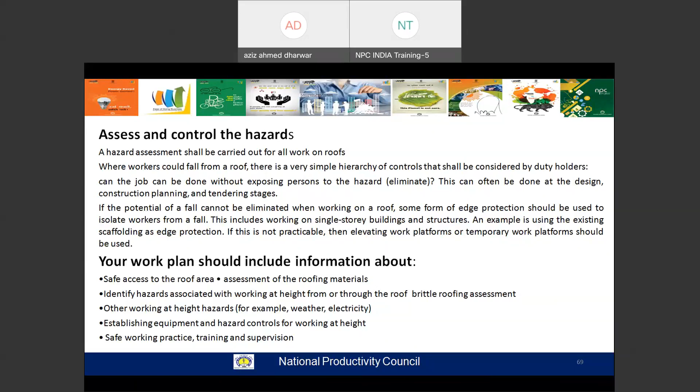Apart from that, the wind condition - what is the wind? And in case if there is a dusty area over there, because of the climatic condition, rain etc., there may be fungus formed on top of that particular roofing, and that becomes very slippery. These are the things we need to check out, and before going into that work, we need to follow these things.

There has to be a safe access. Normally for ready-made roofing, this type of crawl board, safety nets, or roofing ladder, we need to use. This is for ready-made roofing where it comes to repair etc. We have to use this. Roofing ladder also we can use, and boardwalk we can use, so that a person can sit comfortably and do the work, because especially in construction, the height becomes a problem.

But when we go with the construction part, we need to use a scaffold, and edge protection is very much important. The edge protection should be used for the edge at the side, but for that also you need to have a scaffold. These are the things we need to check out when we are working with the roof.

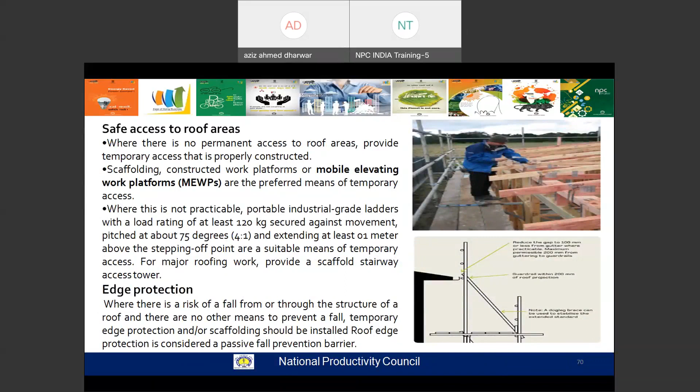When we are using, apart from that, we have one more thing over here - this is safety nets. Safety net we can use it. Normally in construction sites we use safety nets - this also can be utilized, but safety nets are used when a person falls down. But what we are supposed to do is, at this point, we have to stop the fall first and foremost. Why do we have to stop the fall? We have to use it so that the person should not fall down.

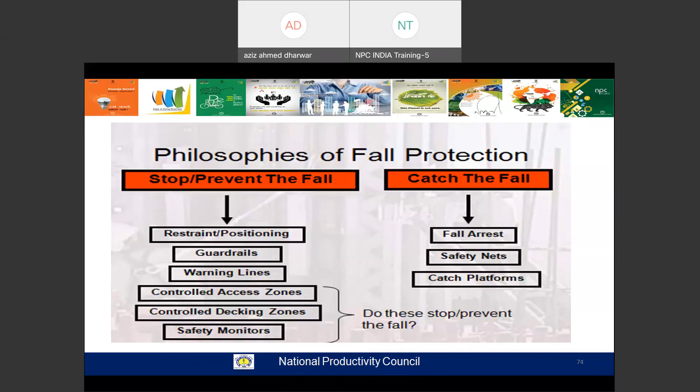When a person falls down, we have safety nets, a fall arrest system, and a catch platform. The main purpose is to stop the fall. To stop the fall, we use this thing, the ABC of fall protection, or the fall arrest system. This is what we use normally for a person.

And to avoid a fall from the top, we have to use the guardrail system. Even if you use a guardrail system, we need to use some restraint, that is a fall protection or your safety harness.

Full body harness is supposed to be used so that we can control the movement of the particular individual. So for fall protection, normally what we say is you can wear a fall protection or full body harness. Earlier only the safety harness was used, but we are not using safety harness nowadays.

We are using full body harness. And this is the full body harness what we have. That is the ABC of full body harness. I'll tell you what it is and why it is important. Body belts or safety belts were used before '98, but nowadays we are not using them. We are supposed to use the full body harness.

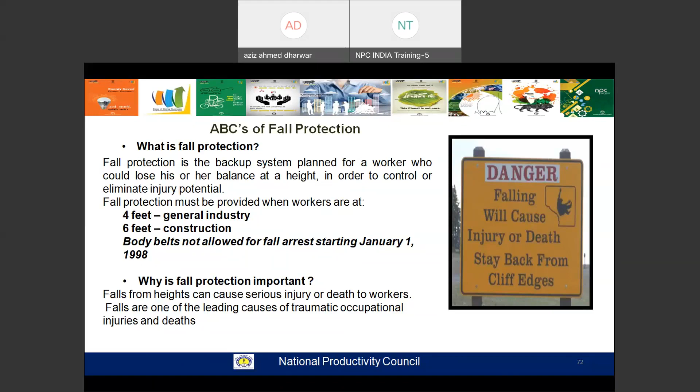For any person who is working at a height of 6 feet and above, this is what happens. See, when a person falls from the top, where we are supposed to fix it up is very, very important.

Normally, what I've seen in construction, they wear the safety harness and tie that lanyard or rope surrounding their body, and they'll keep on working. Because somebody will come for inspection to see whether the person has a full body harness or not. They won't check whether it is fit for use, etc. But yes, he is wearing it. Sometimes we need to check where it has to be fixed also.

The anchorage point, that is the ABC of that, what I will show you. So here, for the fall arrest system, the maximum force on an employee is 1800 pounds when used with the body harness. He should be able to withstand that.

Now see here, what happens if a body falls from a height of 6 feet, the pressure applied on that particular person or body is 5,000 pounds. And if 5,000 pounds is applied onto the body, what will be the condition of the body? So to restrict that 5,000 pounds of movement, we are using a full body harness with a shock absorber.

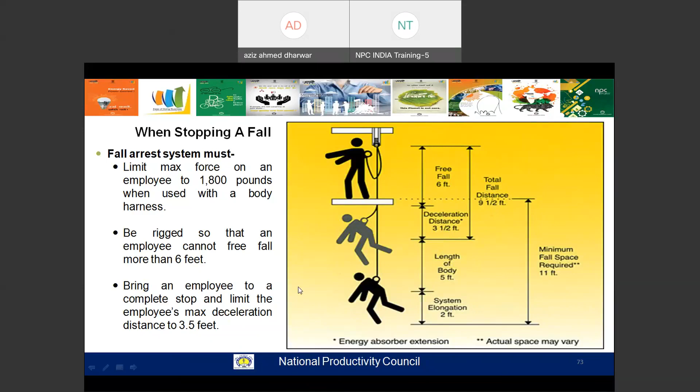So here, when we say ABC of the fall protection, this is anchorage, body harness, and connecting device. Anchorage should be of such a nature that it is strong enough and fixed to the structure where it will be able to take a load or pressure of 5,000 pounds. That is what we require. And there are different types of anchorages depending on the construction part, body, or where we can fix it up.

And here you can see at the right side of the figure, the anchorage is given above the shoulder level, that is above the head. This has to be there. And this is a full body harness. This is a D-ring where it is to be fixed. And this particular part, shown with the arrow, that is the yellow portion, is a decelerating device, or you can say it is a shock absorber.

Why is the shock absorber required? See, when a body falls, if the shock absorber is not there, full pressure is applied onto the thighs and the shoulders. There may be a jerk, there may be a dislocation of those particular points.

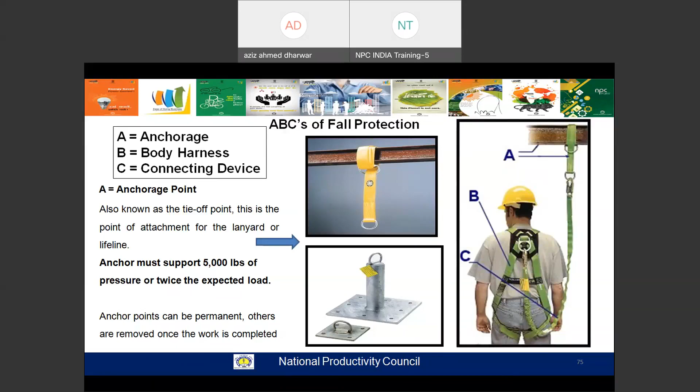Okay, that is the anchorage point. B is a body harness. It has to be of this type. Body harness has to be fixed in a proper way.

When you are fixing this up, the main thing we are supposed to see is that the safety harness has to be inspected properly. Why does it have to be inspected? There should not be any damage or breakage of the stitchings, etc. The carabiners or connecting device at the bottom has to work in a comfortable zone, and it has to have a double locking system.

It has to have a double locking system. Single locking is not permitted. When the individual is wearing that, there is a proper method of wearing it. Proper adjustment is the key factor here.

Whenever you are using it, you have to put these fingers in between so that it is comfortable. One more thing you can see, there is nowhere this one. Earlier it was there, like our buckle, belt, waist belt, there used to be holes in between to fix it up. Nowadays it is not there. It is adjustable.

The reason being, there are different types of bodies. The size of the bodies are different, so it can be adjusted according to the size of the body and fixed up. If the buckle holes are there, then there are chances it will either be tight or loose. Both things are not permitted.

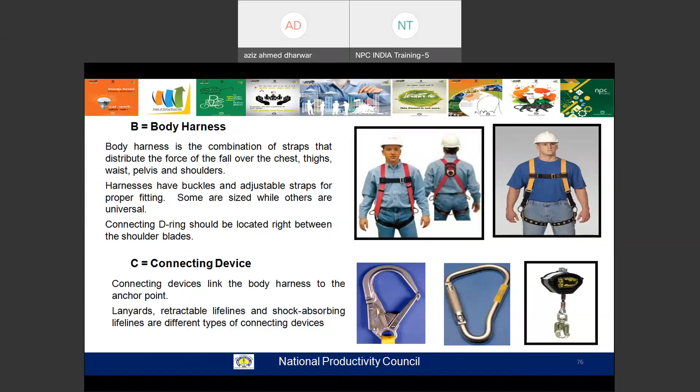So we have to be very careful whenever we are using this particular safety harness. Using a safety harness is not a big thing, but using it properly is a big thing, because it may save the life, or it may be fatal if not used properly. This is very, very important. So with this flow, we can put four fingers and check it out. It should not be loose.

Then the main method, or how to approach fall protection: number one, we should try to eliminate it. That is the best method with respect to safety aspect. We need to try to eliminate, with adjustment in the design or engineering stage, etc. Second is prevention, by barriers, travel restrictions, or guardrails - a person should not fall. But in case a person has to fall, or if he falls, we need to use the ABC full body harness.

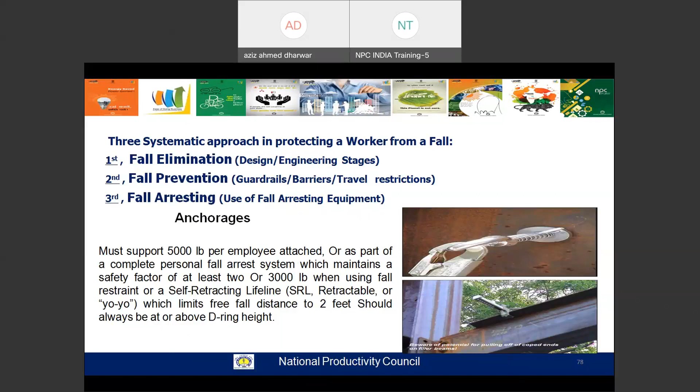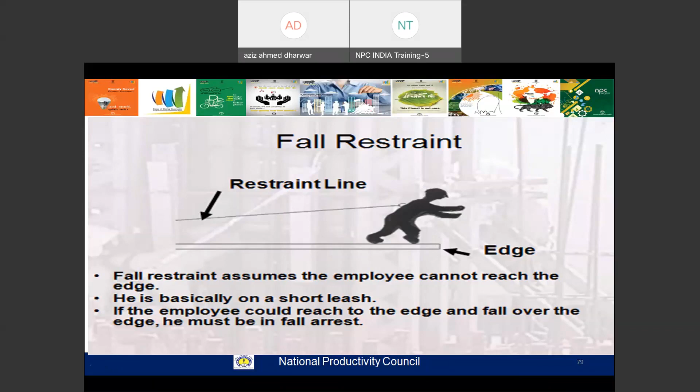That is known as the lifeline, which is fixed to the structure normally. Apart from that, this is the last point we will be having. Suppose in case you are having that, the individual will fall down and land on the net, the safety net. Now nowadays what is happening?

A 4-inch gap is normally used for the human being in case if he falls. But in case if any debris or small materials fall, it will go through the 4-inch gap. So that's why the commonly used net is a 1/2 inch to 3/4 inch mesh. That is what we are using.

So this is the safety net we have to use, and it has to be inspected every week, and the fixing procedure is quite different.

Now how it has to be fixed: if the vertical distance is up to 5 feet, the horizontal distance should be at 8 feet. If the vertical distance is up to 10 feet, the horizontal distance can be up to 10 feet, 5 to 10 feet. If the vertical distance is more than 10 feet, the horizontal distance should be 13 feet.

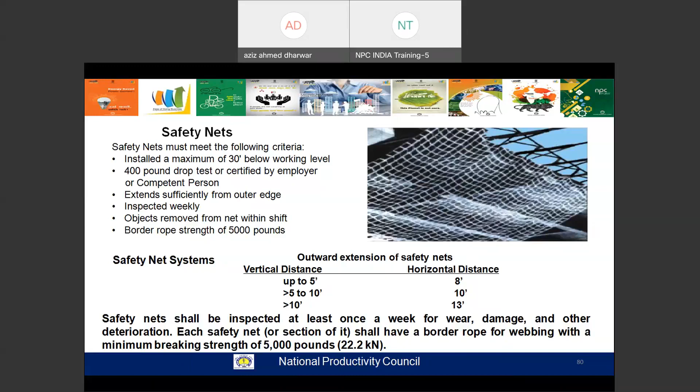Okay, so if you have any questions, I think I've seen some questions. Just check it out. Yes sir, there are about 15 questions, sir. Yeah, so the first question is... just a minute.

Who issues the driving license to a forklift operator? RTO issues it. He should be 18 years and above, and he should have a driving license, because without a driving license, the company itself will not permit him to drive inside, and they will not permit the vehicle either. Even the vehicle has to be in 100% confirmed condition.

Somebody is asking the difference between SWL and WLL. As I told you with a simple example, safe working load is given by the manufacturer. He will tell you, yes, this is the load you can use.

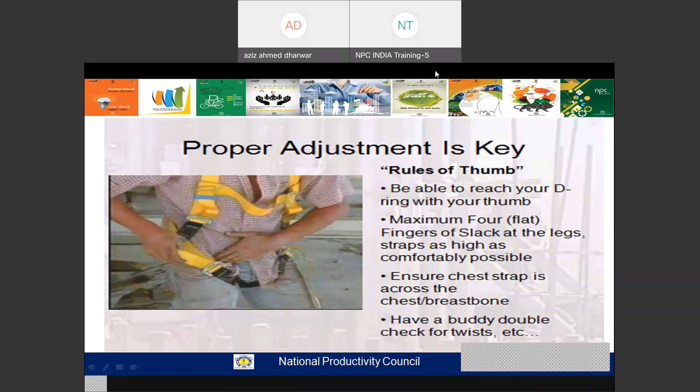Yes sir, next question: how do we use the load chart for a crane? Please explain in brief. For cranes, there is a load chart - normally we have a chart in the crane itself. Earlier it was of an analog nature, nowadays we are having a digital nature.